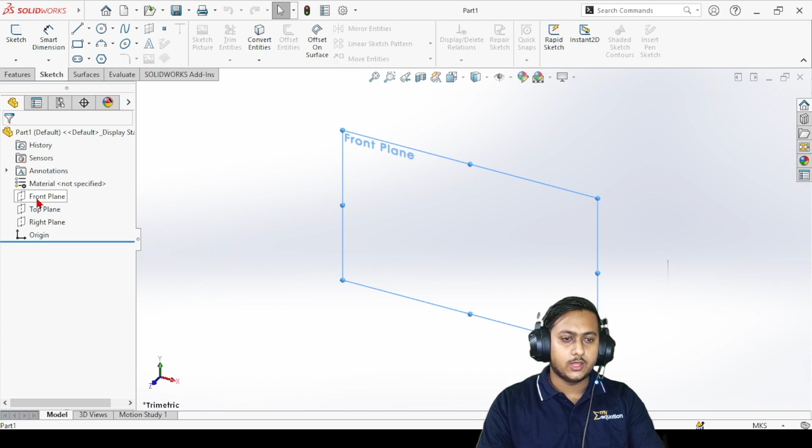So for that, let's go to the top plane and make an axis in the middle first. Let's take a gap from here of around 0.11 meters, and make a circle with a radius of 0.1. Then let's make another circle at a gap of 0.22 meters - I'm taking these dimensions from the model as I told you.

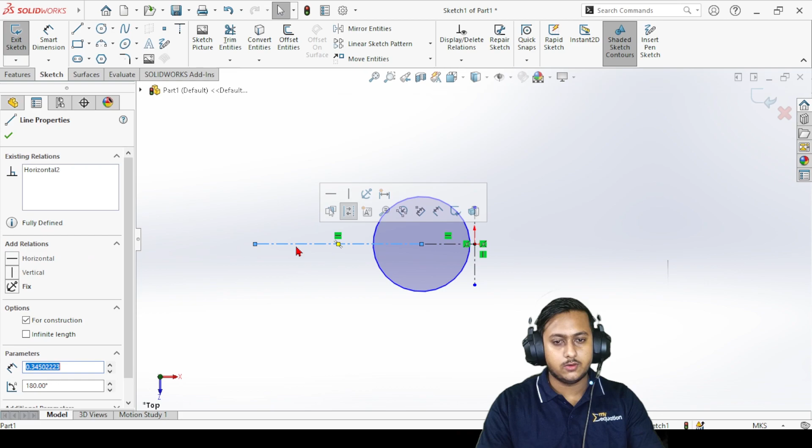Let's make this horizontal, and make this circle fix. Now let's give this line a dimension of 0.22. Now if I make another circle here with a radius of 0.1 again, there you go.

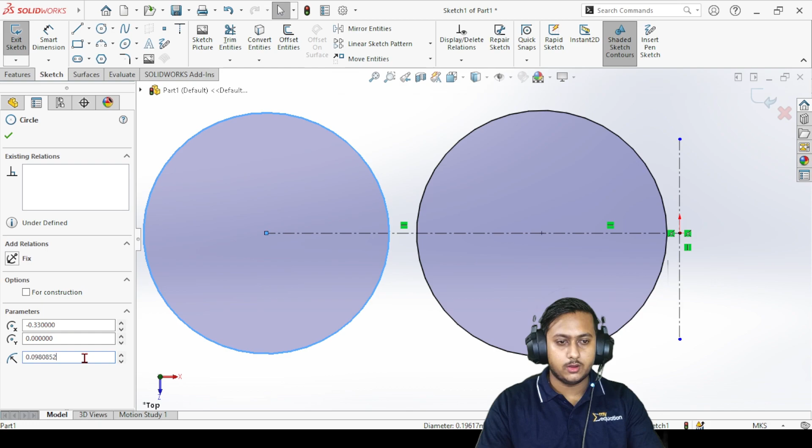Now we can mirror these two circles on the other side. Click on mirror, choose both circles, click mirror, and choose this axis. There you go - these are the four pistons arrangement in my piston assembly. Whichever crankshaft you are making, take the gap and diameter of the piston head from there to make this kind of arrangement.

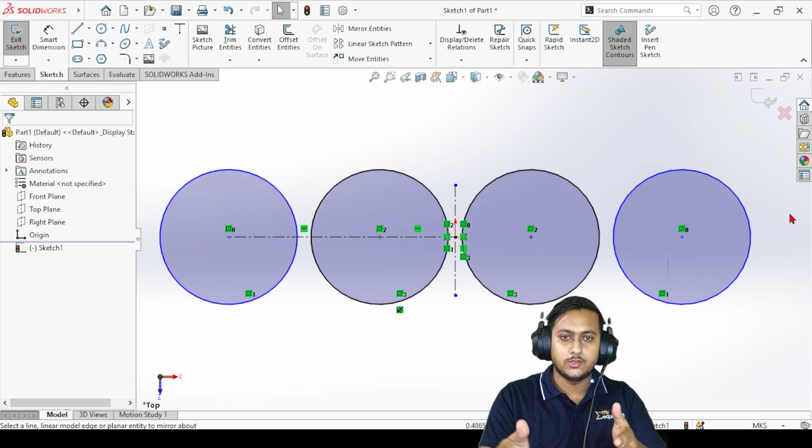After making this, you can make an outer portion for it. Let's choose center rectangle and start making a rectangle from here, something like this, and give this a dimension of 0.3.

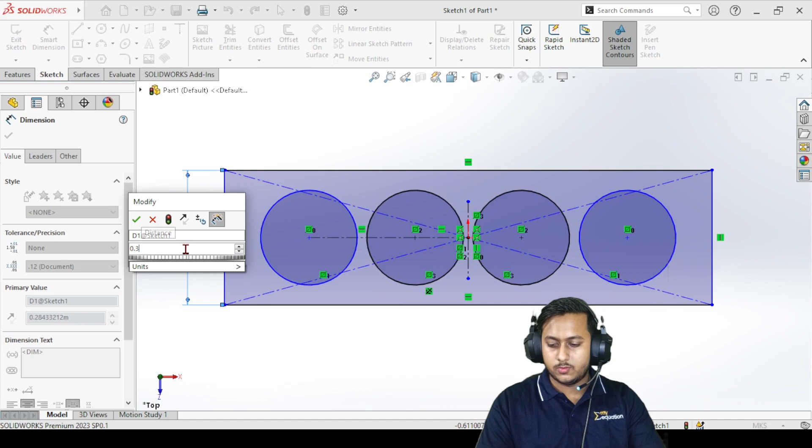All right, let's give this one a dimension of 1.08235. After making this, you can just simply go to extrude, and there you go. You have this geometry ready, and you can just extrude it.

Like this, then you have 4 holes in between on which we can attach our pistons. For this depth, I want to take it as 0.35. Yeah, this is fine, right?

Now we can just make the bottom part of it where we want some hollow portion, so that the connecting rod can move around with the crankshaft. So they have some space for rotation.

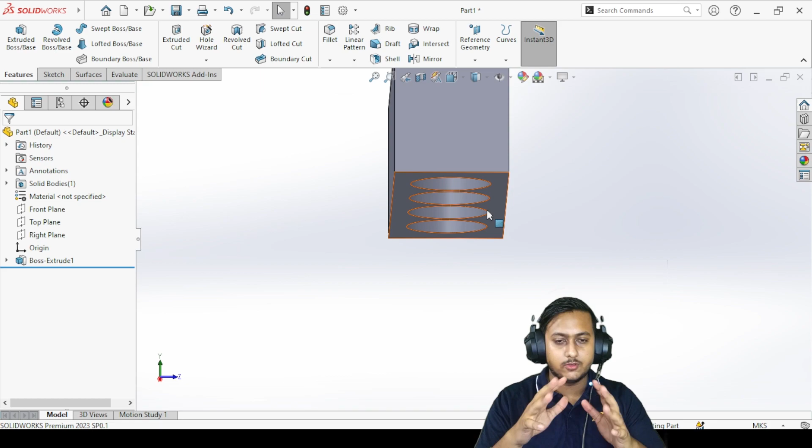For that, I'm going to choose this surface as a sketch, and I'm going to make an arc. First, let's just make an axis, and let's give it a length of 0.82.

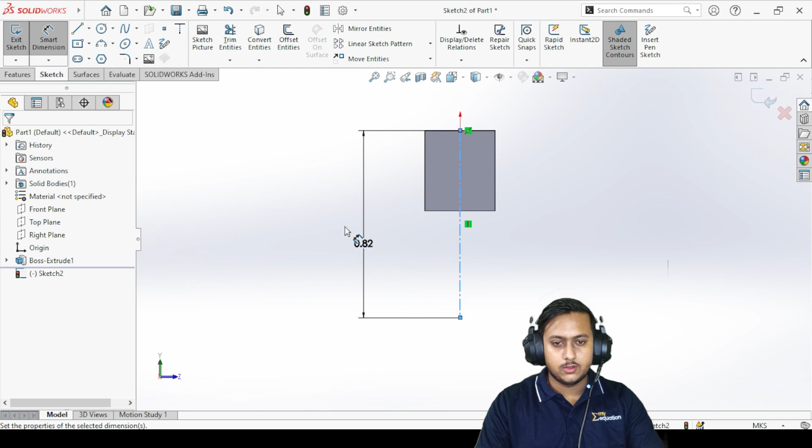0.82. There you go. Now I want to make a circle with a radius of 0.25. So let me just type 0.25. So this will be our radius, right?

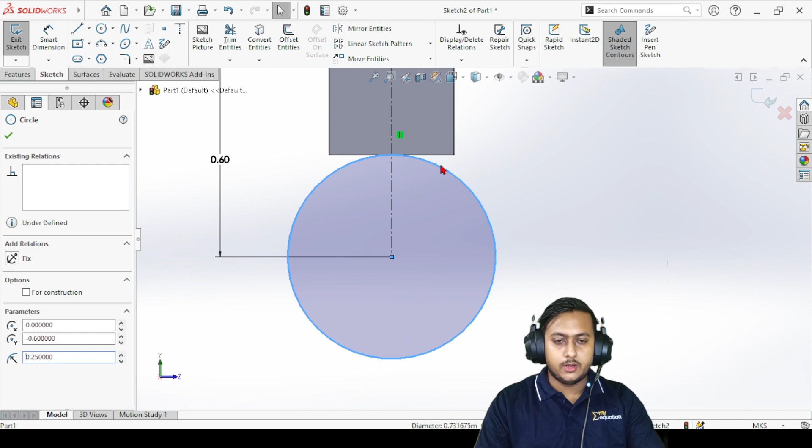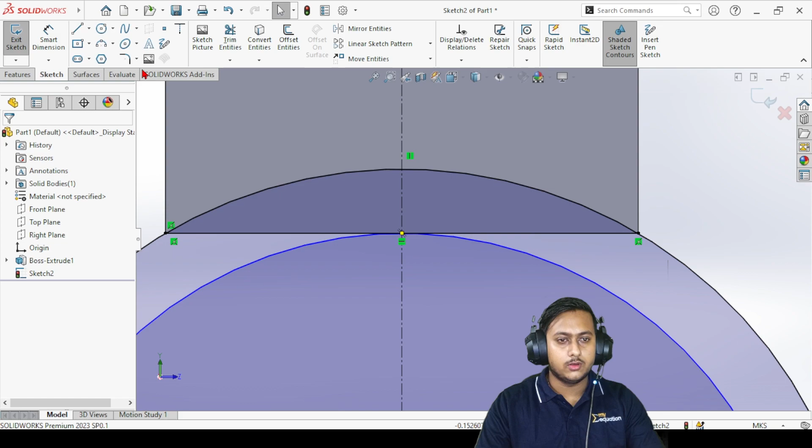Now let me just close this by choosing this end point, and let's just trim the part which we don't want. First, let's choose a line and close it from this point to this point. Now I don't want this line over here, so just choose trim and delete it. There you go.

After this, you can just simply extrude it if you want to. First, let's just make another hole over here for taking our shaft out from the crankshaft.

For that, let's just go to the standard plane centered view again, and let's make a circle in between which has a radius of 0.035.

Right now, basically, the cylinder block is just the half portion above this straight line, because for the bottom side we have another part made which is actually connected after putting all the assembly inside.

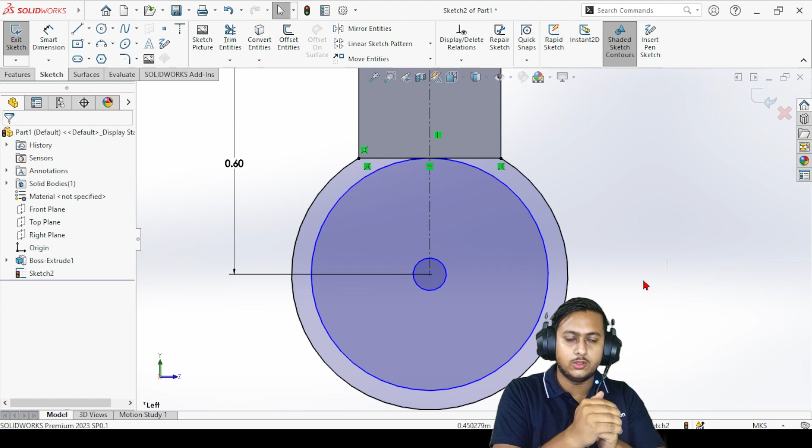So for that, I'm going to cut this portion in half. Let's just make a straight line, and let's choose trim to delete those lines which we don't want.

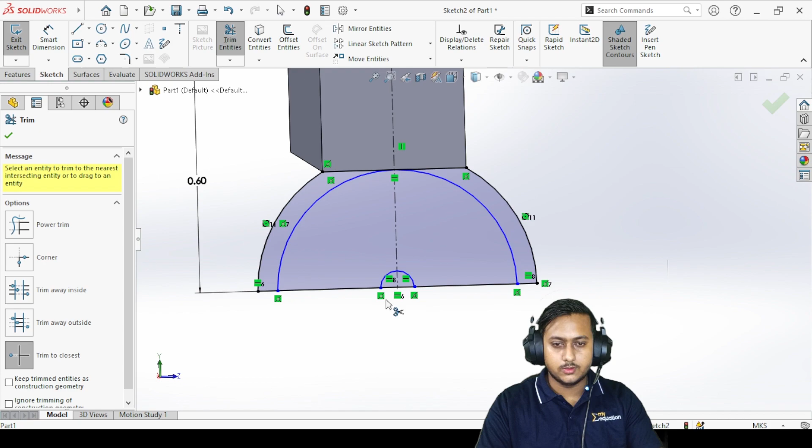Okay, I forgot to delete this line over here. Now we are good to go. And let's just delete this one over here as well in the middle.

Actually, I think first we have to make the whole solid part, and then we have to cut it, because I want a hole over here as well, and I want this part inside as hollow, not this outer part. I want this portion to be hollow inside, and at the outer portion, I want this to be cut.

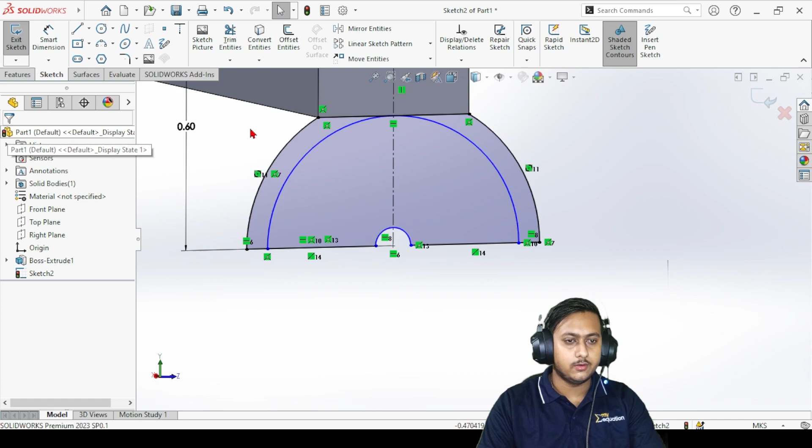So what I can do, let's just cut it for now. Let's just extrude it, and let's just delete this middle line. Let's just extrude it till the end on this side, and instead of blind, choose up to surface and select this surface.

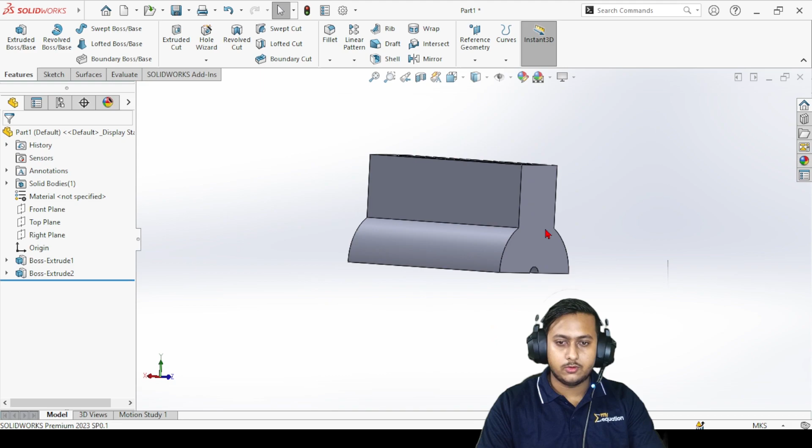Now we have this geometry ready. Now we can just make a reference plane inside, adding some gap. Just make sure that this gap must be bigger than that gap on which we are going to make a reference plane.

So for that, let's choose a reference plane, let's choose the surface, and I want it in the inward direction, so let's just flip the direction. Click on this flip offset feature, and just increase the gap. This is fine, just click OK.

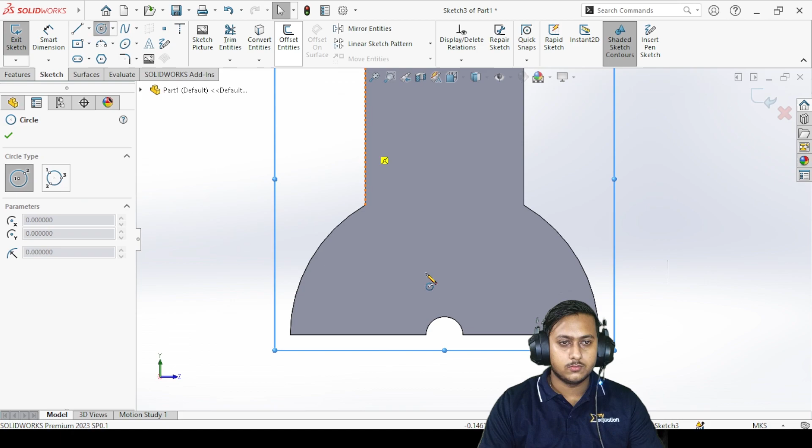On this plane, we are going to make the similar profile to cut. So we are going to make again a circle, choose the center, and make a profile with a similar radius, just like that one, which is 0.25. Just like this, and as you can see, it is over here.

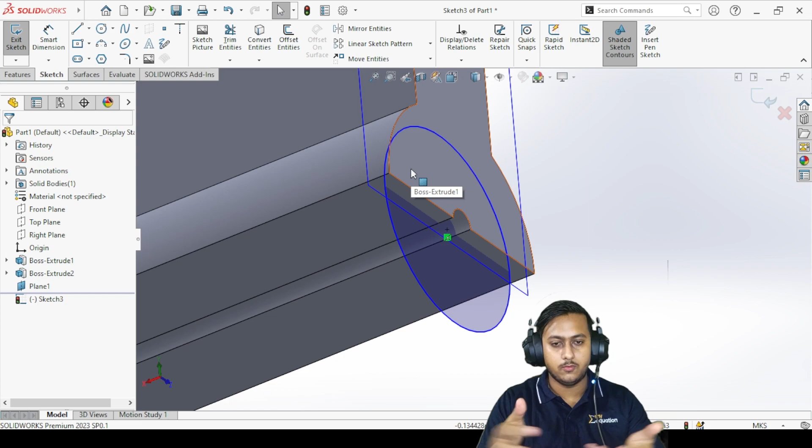So if we cut this end portion, it has some thickness which we actually want. So now we can just simply cut it like this as well, because we are cutting it, it doesn't matter if you remove the bottom portion or not.

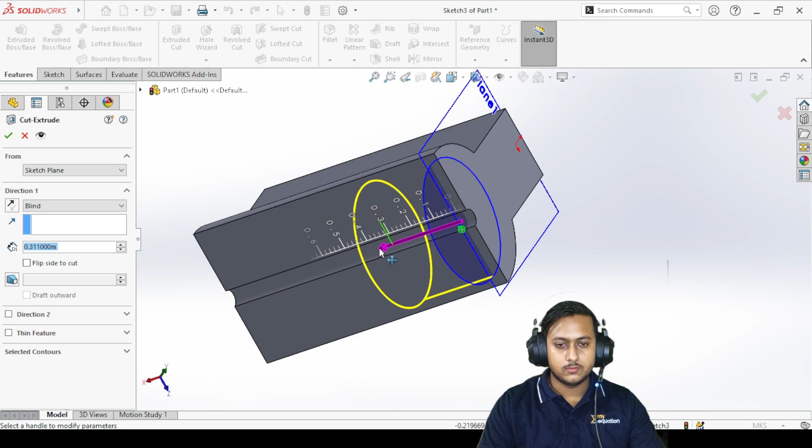For this one over here, let me just drag this. This whole length is something around, I actually didn't measure the length. First, let's just close this.

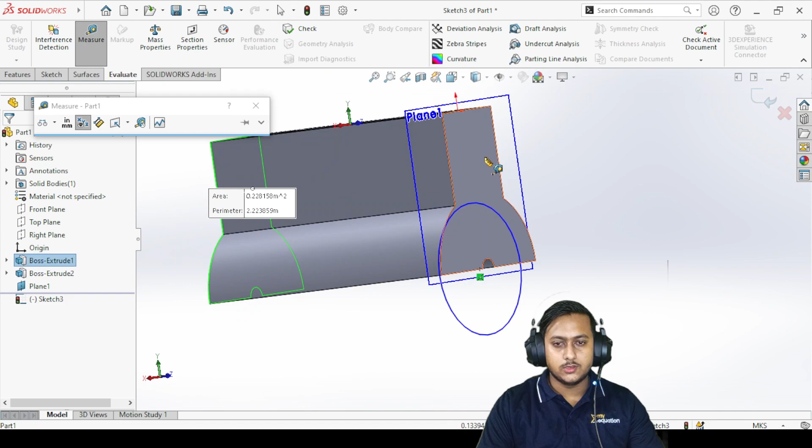Let's go to evaluate, let's go to measure, and just select these two faces so that we can actually know the length of it, which is something around 1.08 meters. Yeah, it is 1.08 meters.

So now on this side we have a gap of 0.04, and on the other side as well we have a gap of 0.04, which is equal to 0.08. Then we just have to give this cut a length of 1 meter.

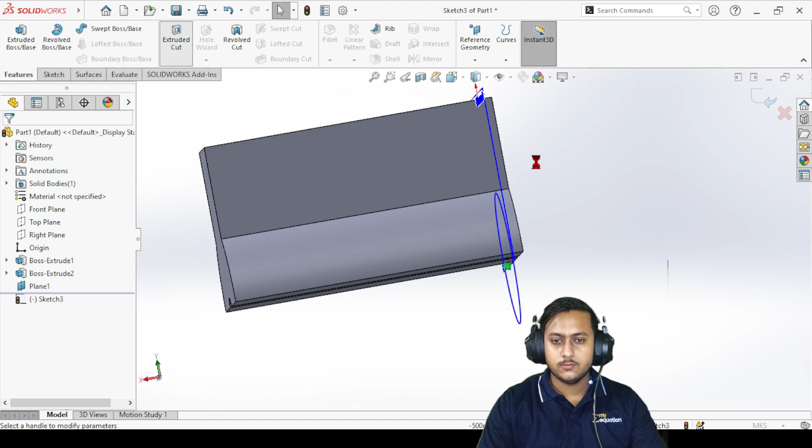So let's just go to extrude cut now, and let's give this one as, sorry, 1. There you go. Okay, it has some errors. Now let's see what error do we have.

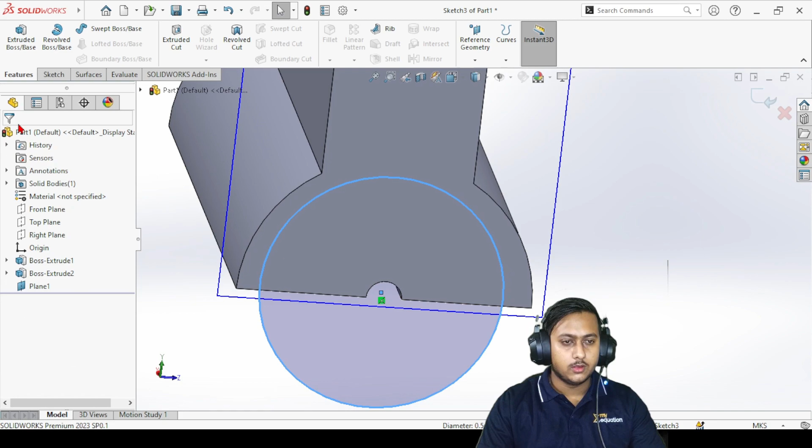It might show an error because we have an open boundary here with a similar length, which is actually 0.05. So instead of 0.25, let's decrease this length to 0.24. This should work. Now let's go to the extrude cut feature again, give it a length of 1, and click OK.

There you go. Now we can select and hide this plane. As you can see, we have some gap, but we have lost those holes.

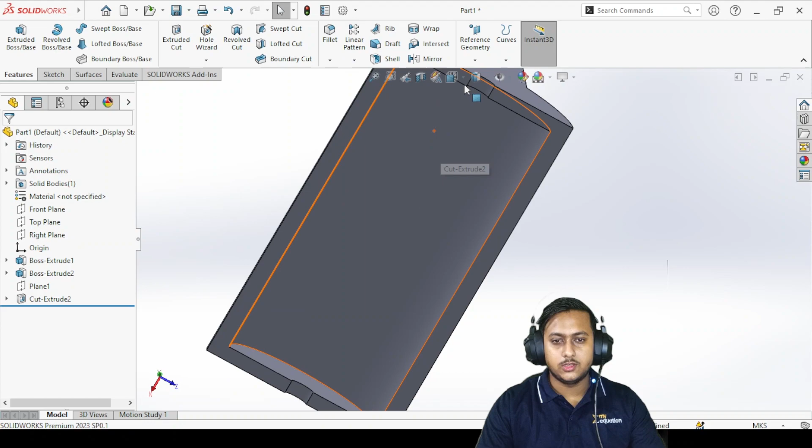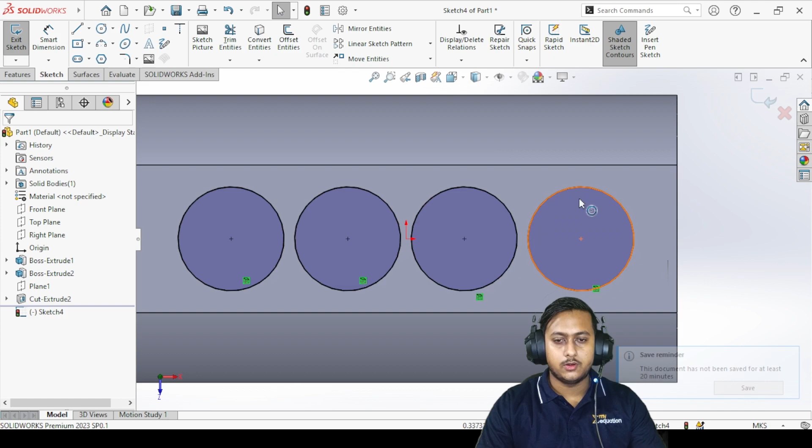So what we can do is click here, go to sketch, choose all these circles, or simply select and click on convert. Select and convert again. Now we can cut it. Just decrease this length and click OK.

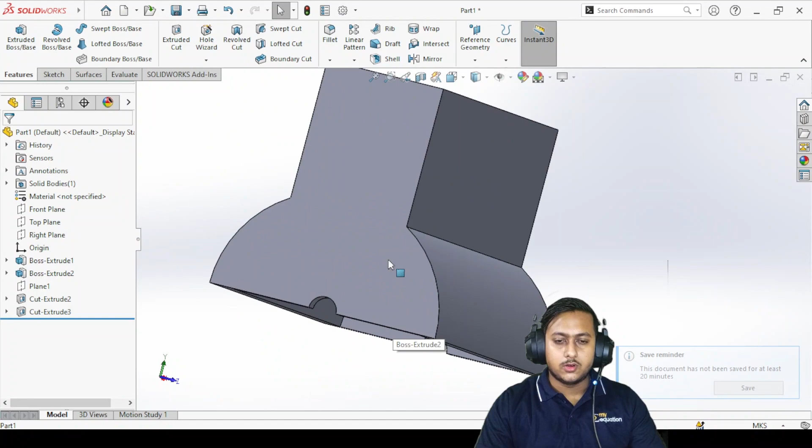There you have it. You have all these holes ready to attach your pistons, connecting rod, and crankshaft. Now we can just leave it here, or do some detailing for better heat distribution on this whole cylinder block, because the combustion reaction is going to happen on this body. The main force of that reaction happens on the cylinder block and piston.

So let's make those holes for good heat distribution, and after that go to fillet and finish it. Let's do some detailing with one part, and give it some pattern, add some length.

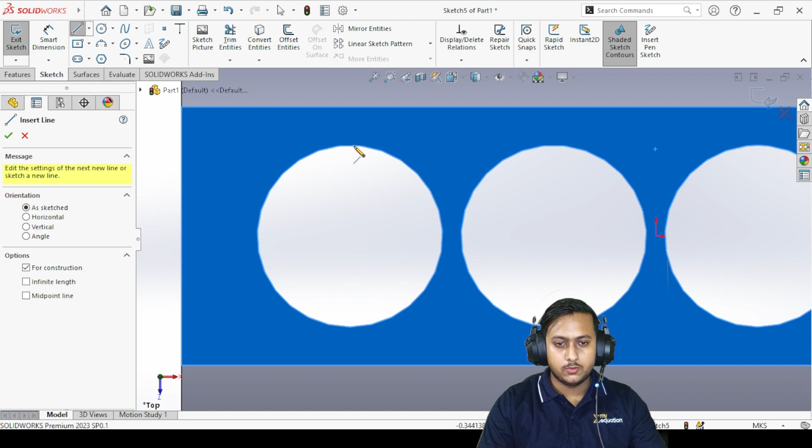So let's make an axis first to know the exact gap between them. This is 0.1 and this is 0.11. So let's give this a length of 0.11.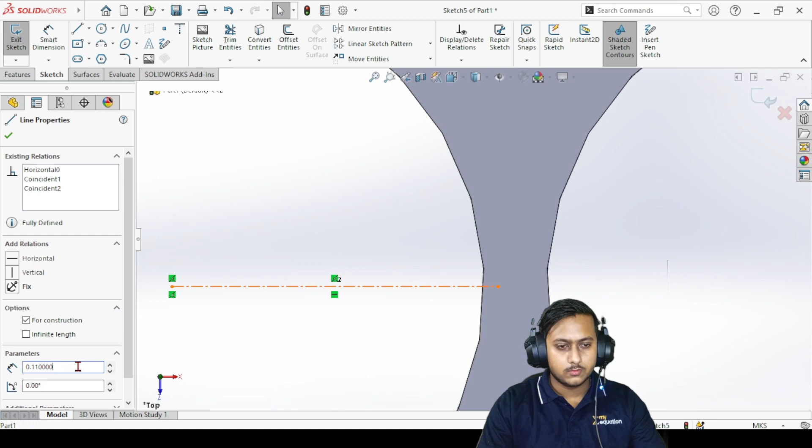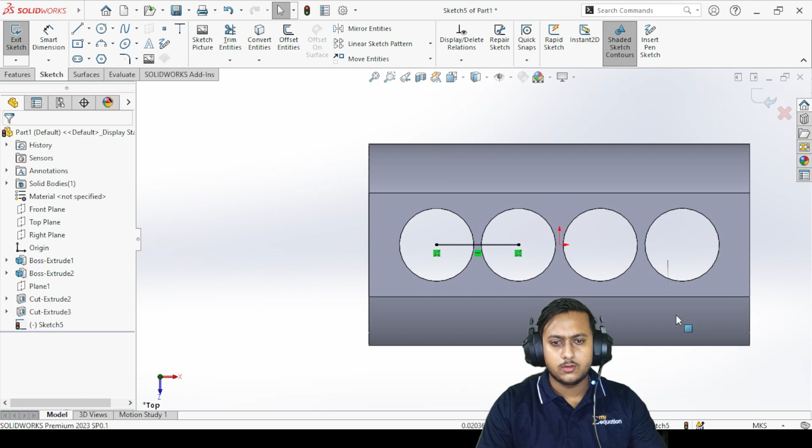Wait a second, let's see the gap between them first. Let's select a point here and a point here, and this is 0.23 something. But if I remember, I actually gave it a length of 0.22. Just give me a second, guys, I guess we have a mistake here.

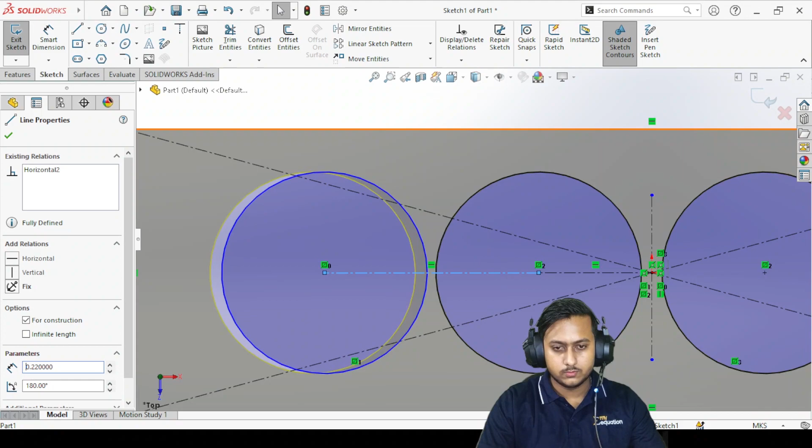Let's correct it. First, exit out from the sketch and click on edit sketch, and let's see if we gave this a length of 0. Okay, let's give it a length of 0.22. There you go, now click exit, and we have it. Now we can edit the sketch.

Let's delete this line and make an axis. Let's place it here and give it a length of 0.11. Now, as you can see, it is exactly in the middle.

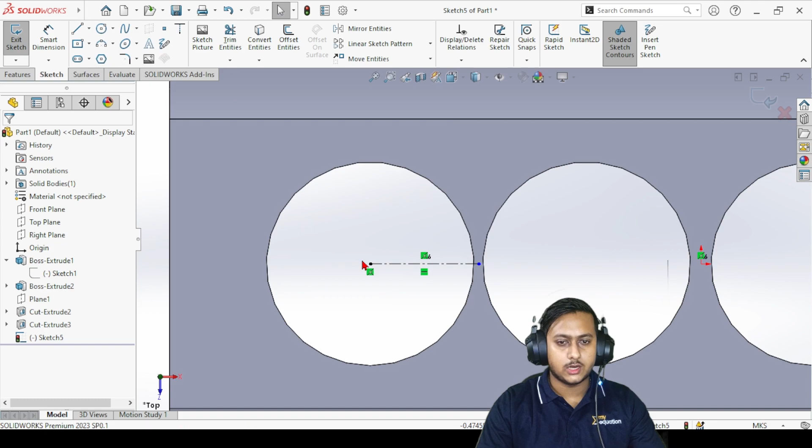Now we can simply place a similar line on the axis above, just to give it a standard dimension. Let's place a line here and give it a dimension of, let's say, 0.12.

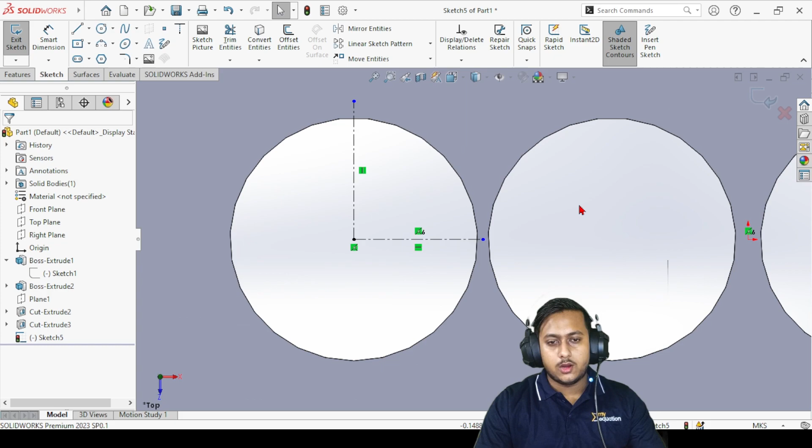Now, whichever pattern we make, we're going to make it inside this square portion. If you want, you can actually make a square. Just click on this point and take a dimension from here, and click on this. Now we're going to make all those holes.

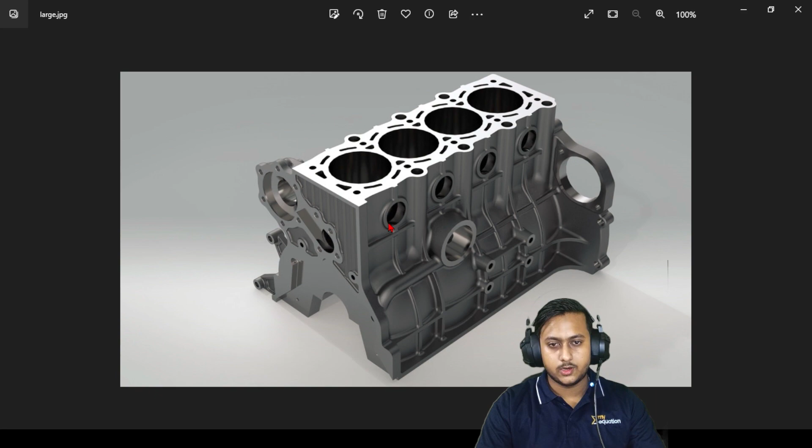For that, you can take reference from this image, or just make random holes if you want. If we take a reference from this image, it has one circle, then one profile. In the middle there's a small triangular kind of hole with some round edges. On the other side, the left side, it has a similar hole and an arc kind of hole on top, and a similar triangular hole which is kind of deep on the left side, where we don't have a connection between two holes. So let's make something like this.

Let's start making a hole from here. Okay, not here. Yeah, exactly over here.

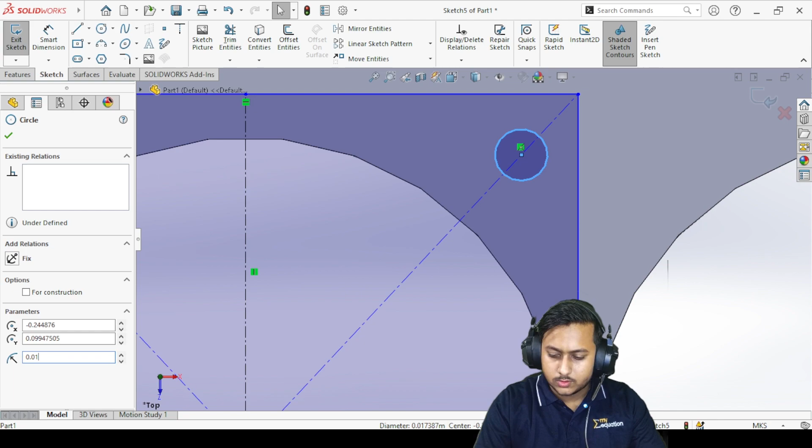Let's give it a dimension of 0.01. Now let's make another hole over here, a little down from there. Let's make something like this, and let's give this one some kind of curve.

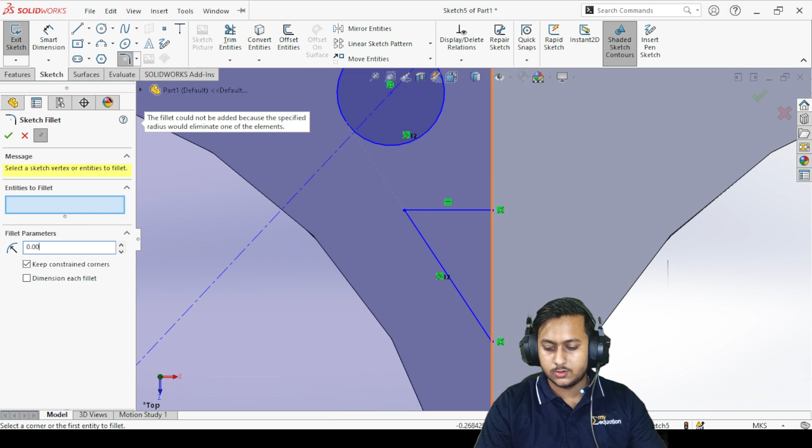For here, I'm going to choose this fillet, and let's decrease this radius to 0.004. Now if I choose this point, it has this kind of curve.

Over here, if you want to give the curve, then you have to make a line first. So let's make a straight line over here. Or let's avoid a straight line, let's make a similar line just like this line over here. So for that, what we can do...

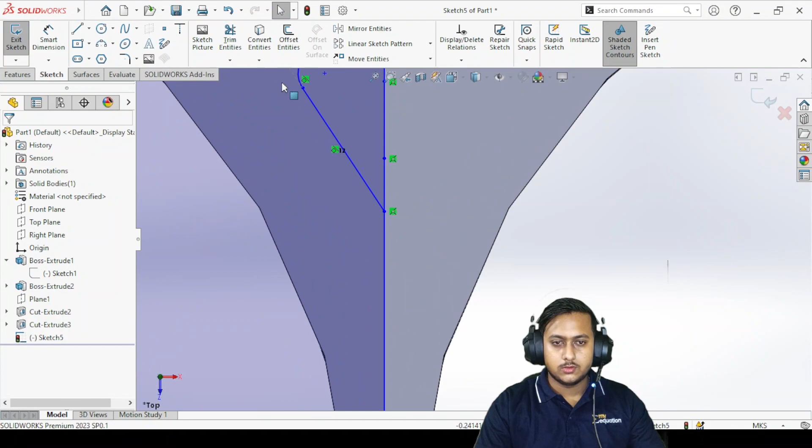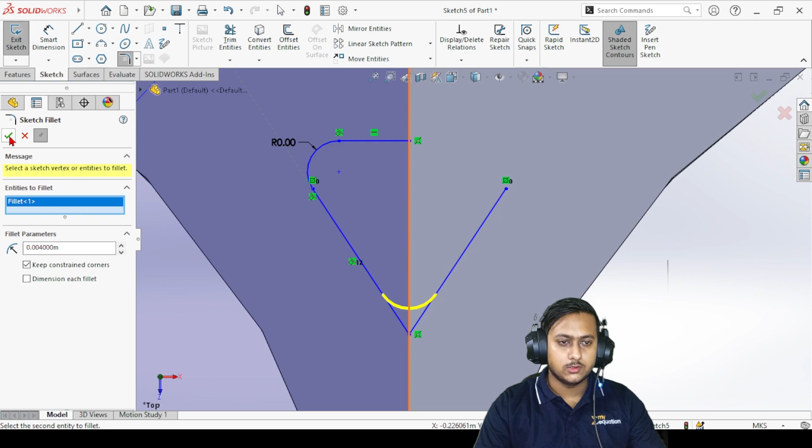Now what we can do is go to mirror, choose this line, and on the mirror about, choose this axis. There you go. Now you can choose the fillet and give it a fillet like this. Over here, yeah, it is fine.

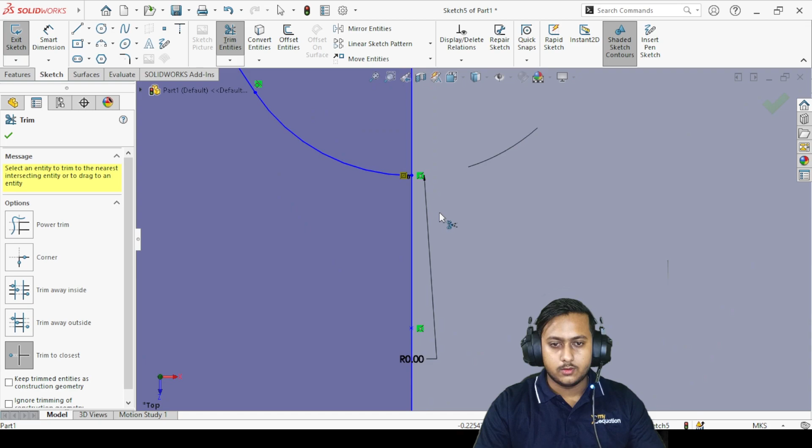Now what you can do, you can simply delete this, or let's just trim it instead of deleting it. Yeah, this is fine. Now it is fine. Now you can click over here, and let's make a pattern over here, which is an arc.

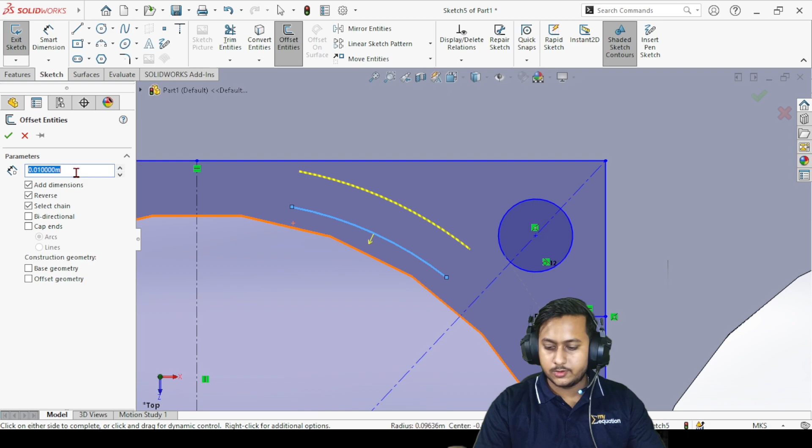Let's choose an arc. Let's make an arc over here. Let's give it an offset, reverse, and let's decrease this radius to 0.008. Click on OK, and let's choose another two arcs.

Just like that over here as well. Now what we can do, we can just mirror it. So let's go to mirror, let's choose these two, and let's click on mirror.

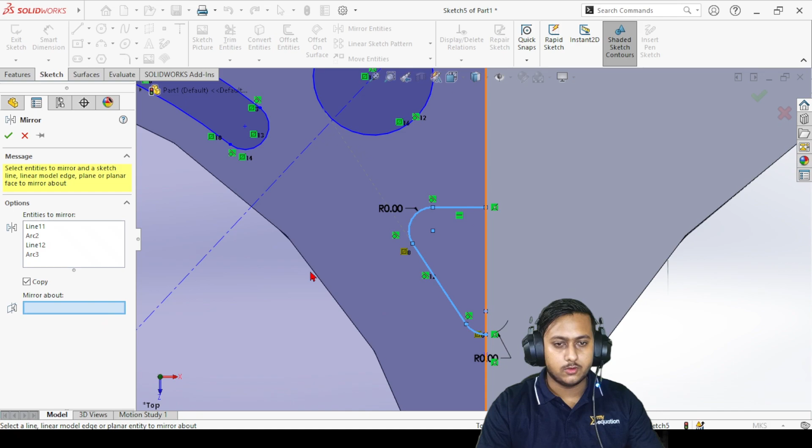Or instead of making that deep cut, you can just make this kind of cut over there as well. Let's go to mirror and let's choose this one, this one, this one, and this line over here. Let's click on mirror and let's choose the middle axis.

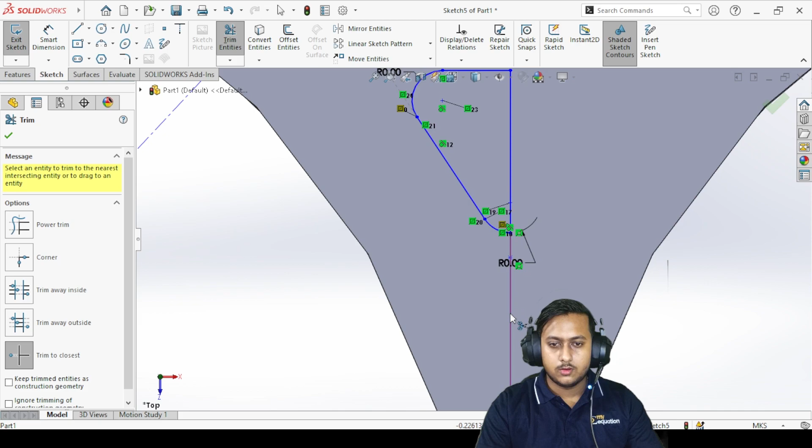There you go. Now what we can do, we can simply delete the square from here, which we don't want. Let's delete this edge, delete this one over here, and let's delete this one from there. Just like that.

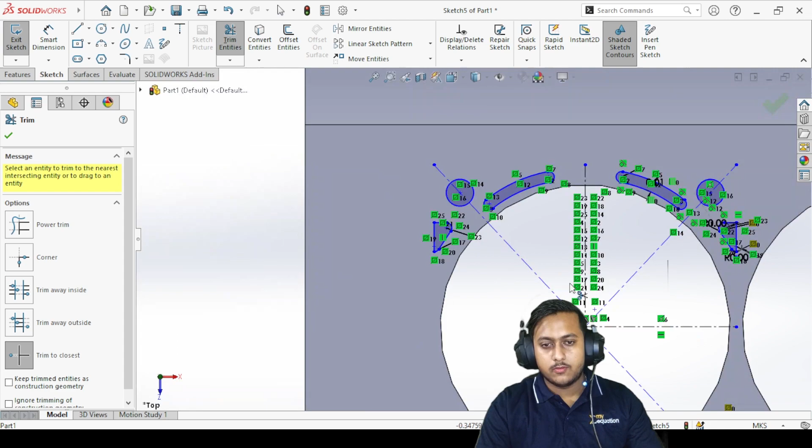Right, and we can mirror. We can actually delete this, but that will affect this line over here as well. So what we can do is delete it one by one. Now what I'm going to do is mirror this whole pattern on the other side, or first let's just mirror it on this side over here. So for that I'm going to select one by one every single thing.

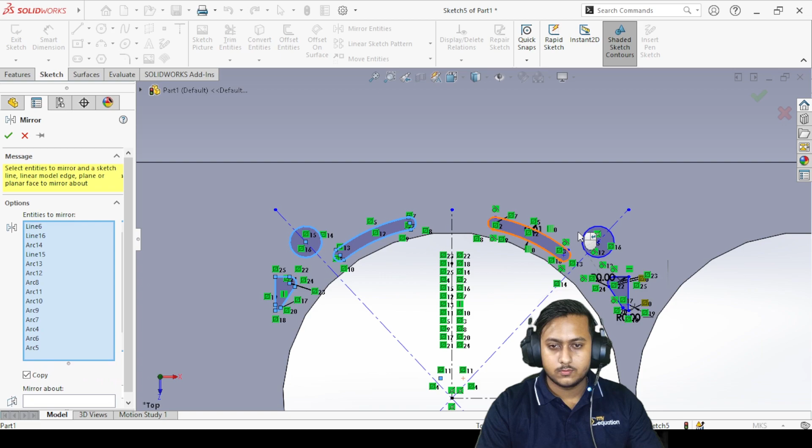Just like that. Click on this axis for the mirror. There you have the similar pattern.

Now you can use linear pattern to mirror it, or you can simply mirror this one by one, whichever you find comfortable. I'm going to use the linear sketch pattern, and I'm going to select first the x-axis, yeah, and in this...

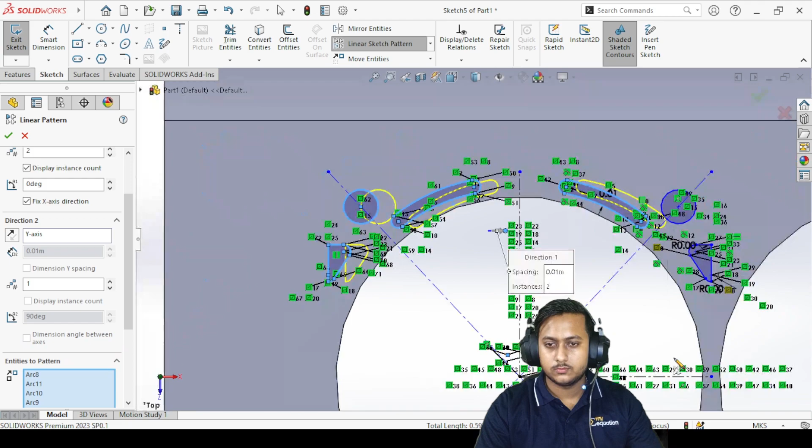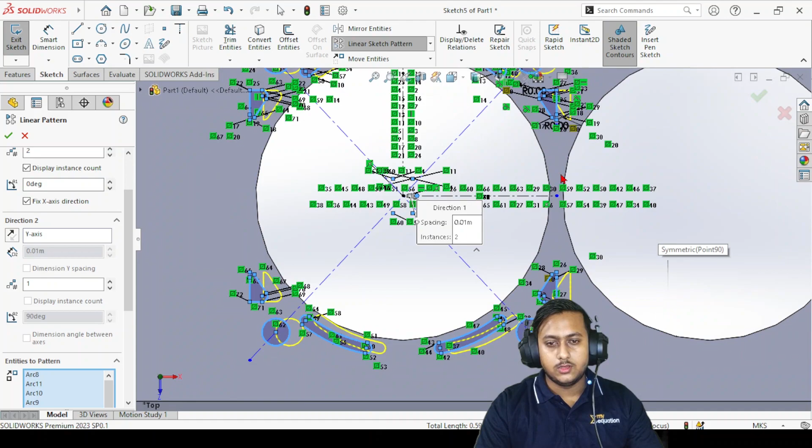Choose the select tab, just select all these things one by one. There are a lot of constraints over here, that's why it is taking some time. To avoid that, you can delete it one by one from the very start. These green things are actually constraints. If you want, you can delete them. And right now we have selected everything.

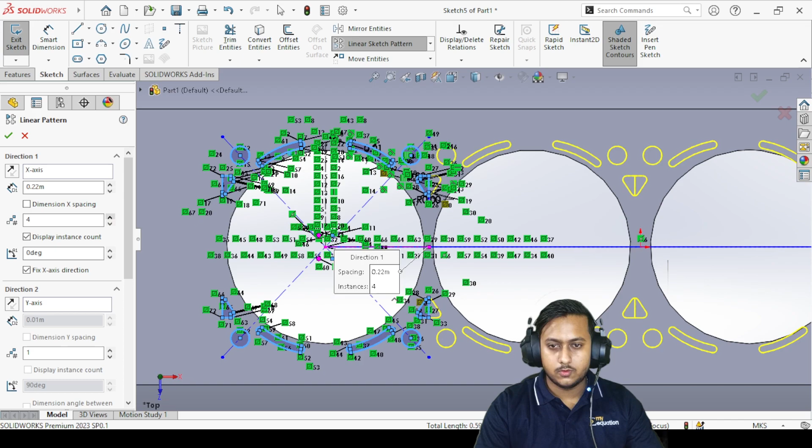Now we can increase the distance between them to, let's say, 0.22. And we can increase the number of patterns to 4. Now if I click on OK, as you can see, it is saying that it contains a large number of relations. Just click on yes, and there you go.

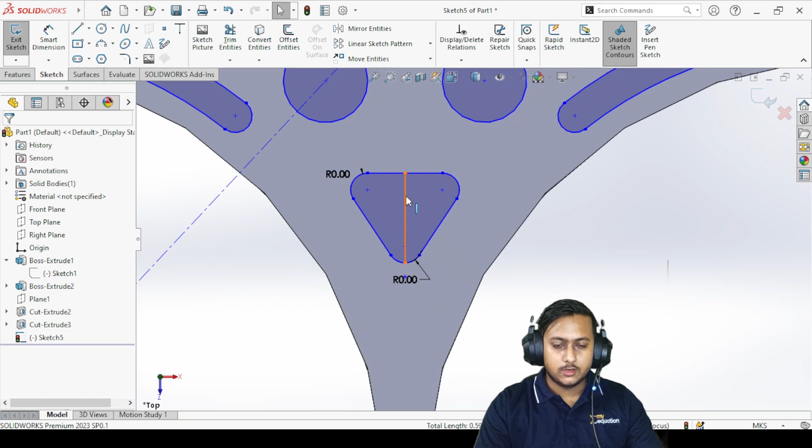Now it will make your interface a little slow, but don't worry, just give it some time and it will be fine. Now let's delete this line over here.

Let's delete it again. There are two lines now, and we want this whole sketch as one, we want to delete it. So let's trim this portion over here as well. There you go. Over here it is fine. Let's delete this from here as well.

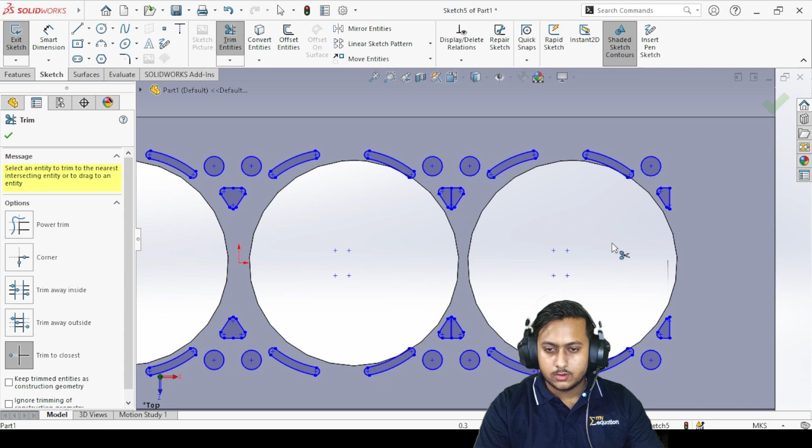Okay, this is not in the middle. Did we do anything wrong? Let me just see. Let's press Ctrl Z.

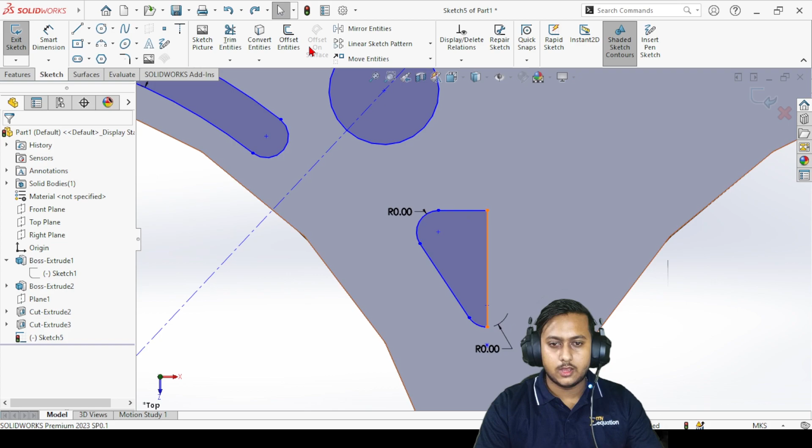Yeah, we are back again over here. What we can do is simply avoid this line over here. That will help us a lot. Let me just see what is the dimension issue.

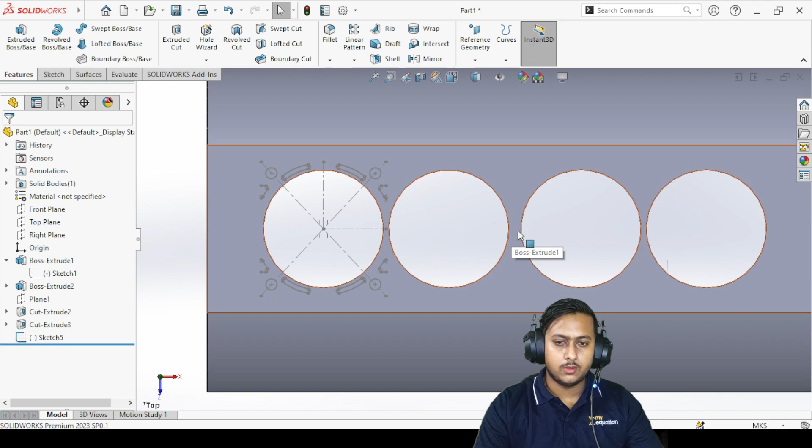Yeah, now it is fine. Let's just delete this line over here as well. Now if I click OK and exit the sketch once, let me see if these two are at the similar gap or not. Let me just check. Yeah, actually this gap is a bit higher than usual, as you can see over here, it is less, right?

And this is creating issues, so let's just fix it. Again, go to the sketch, go to edit, and you can just change this gap between them. Just go to smart dimension.

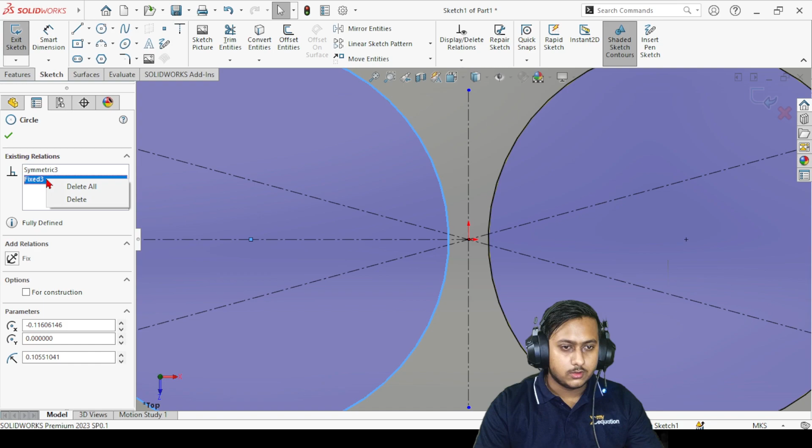Or before going to smart dimension, if you remember, I fixed this sketch, so let's just delete this fixed constraint. I deleted them all, don't worry.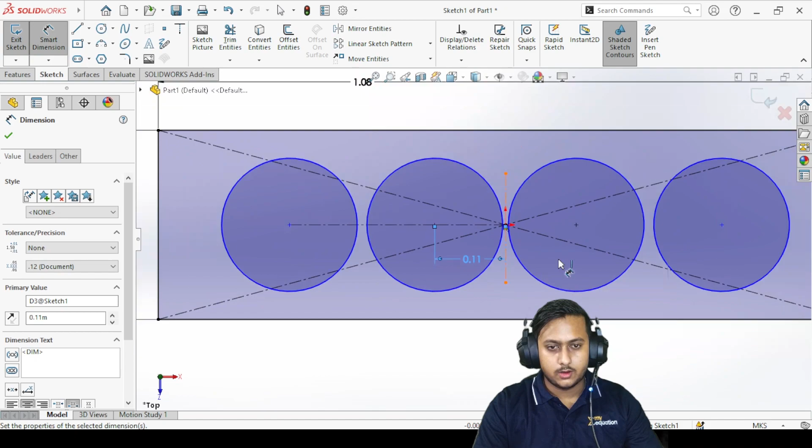Just click on smart dimension and choose this point over here and choose this point, and just specify this gap as 0.11. Yes, right. And over here also, just define the gap instead of giving the dimension to the line.

As you can see, it is increased. Just give it 0.22, right, that will do the thing. And yeah, it is changed everywhere. Now we can just click OK and exit the sketch, right?

Now let's get back again to the sketch, and let's just give it a pattern, a linear sketch pattern. Okay, there are some changes over here, as you can see, because I changed that sketch.

So let's just clear them over here. Select the middle point. Okay, it is not from here. Let's place a line on this.

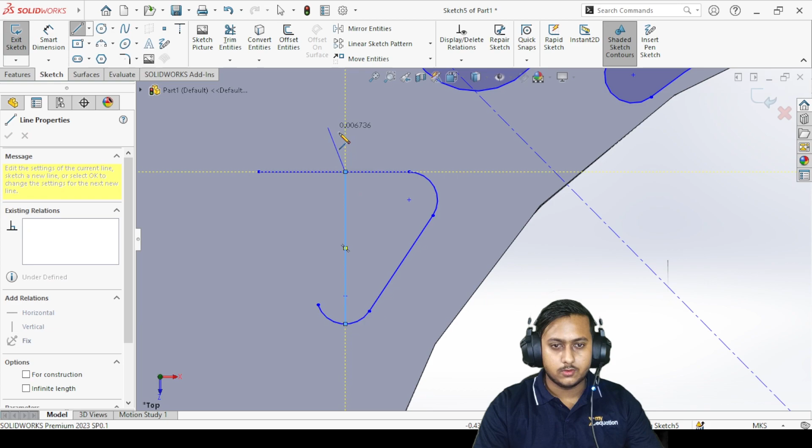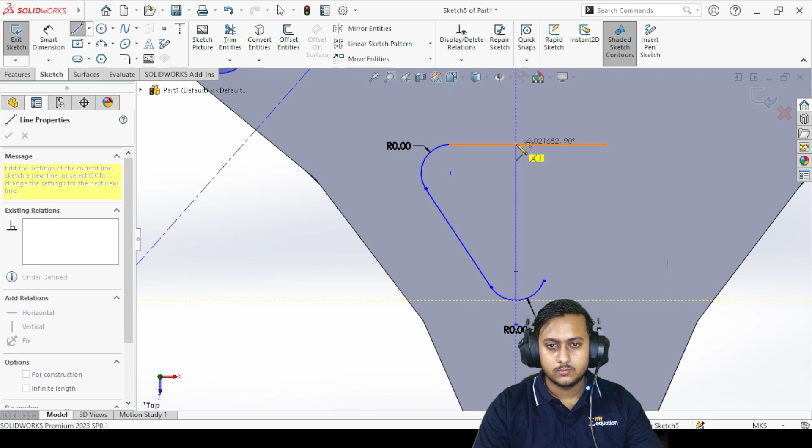A similar line over here from the middle point. Yeah, from here. Just make two lines, similar like that, over here as well, from the middle point, vertically upwards and vertically downwards over there as well.

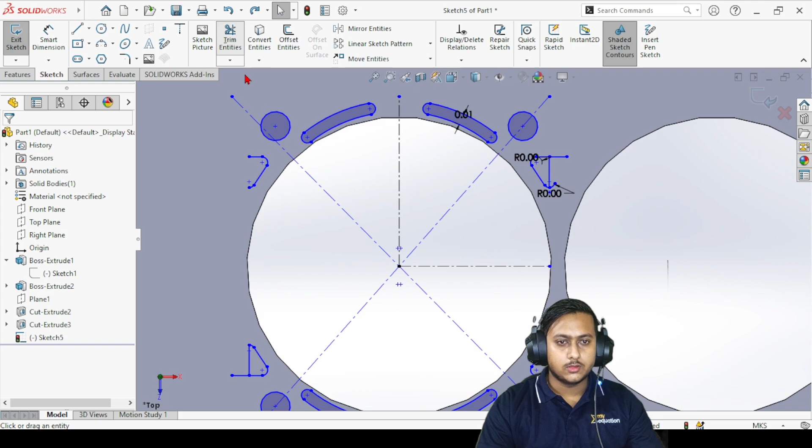Right now we can just trim this feature, this extra part actually, and let's just trim this line again for this one. Okay, just press Ctrl Z. Yeah, now let's get back again to trim, and first delete this line, then you can just delete this one.

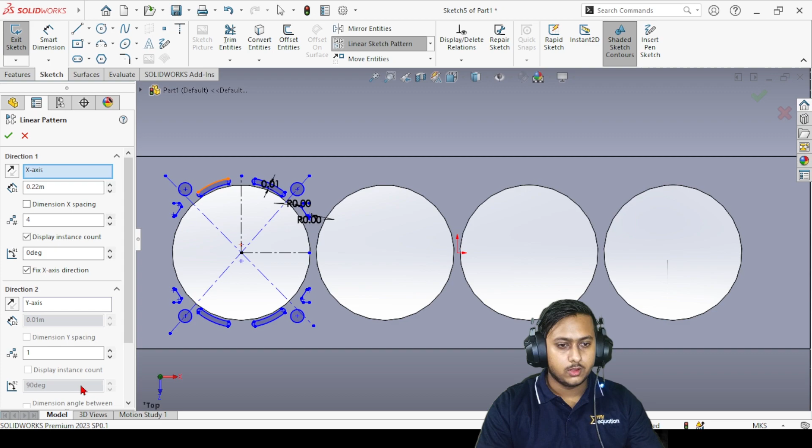There you go. Now if I just give it a pattern, it will just do the trick. Just give it to linear sketch and select this gap 0.22, increase the number to 4, and in this selection tab just select all of these.

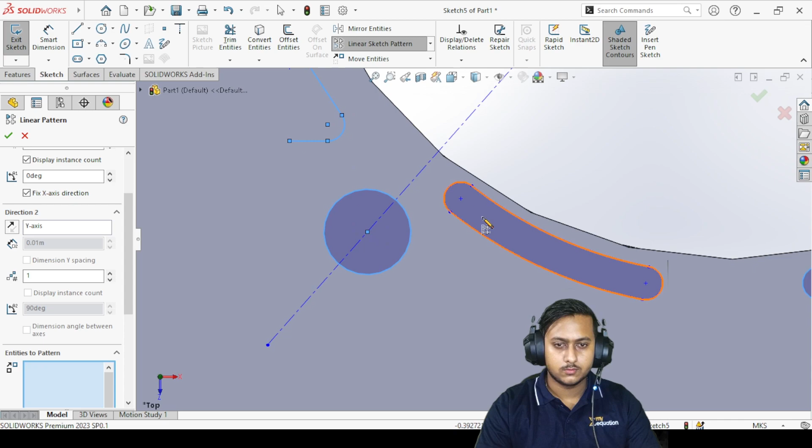Okay, there is some gap between them. That issue comes because we changed that sketch, but we can fix it. We can just make some lines to connect them. So for now, let's just click on OK, and as you can see, these are not messing up right now.

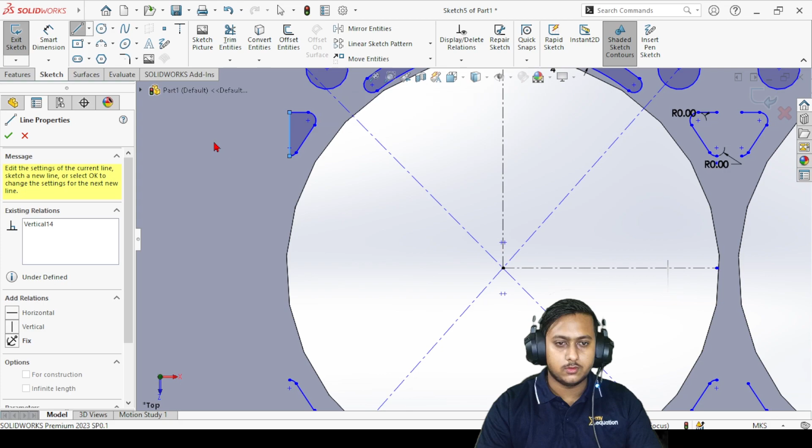We can just make some lines to connect them. Let's just make some lines to connect all these open things, right? A straight line, connect them one by one.

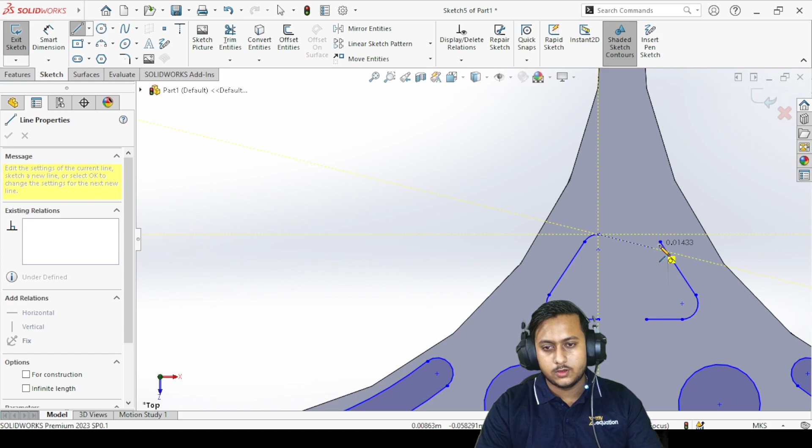Okay, we forgot to add this one over there. Let's just connect it like this, and let's choose this one over here. You can fix it, right? You can just press Ctrl Z again and select everything. I actually forgot to select that part, just on the downward one.

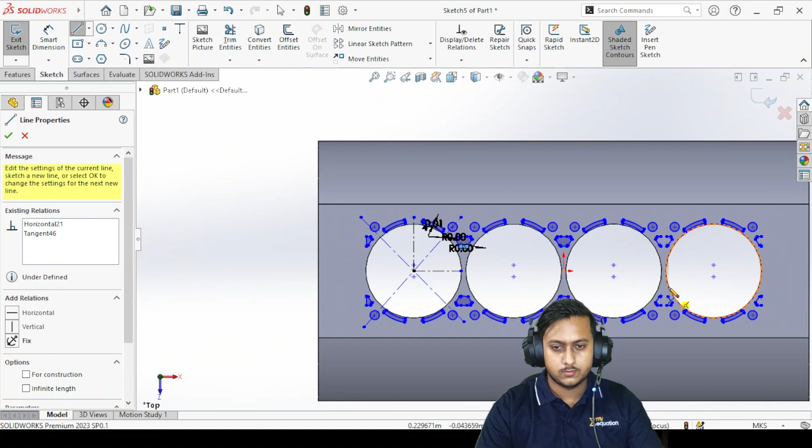One more advice from my side: while you make these kind of patterns, sometimes, very few times, SolidWorks actually crashes. So just make sure you save your file. If you have less than 4 GB of RAM — if you have more than that, then don't worry — just don't run too many other things alongside SolidWorks.

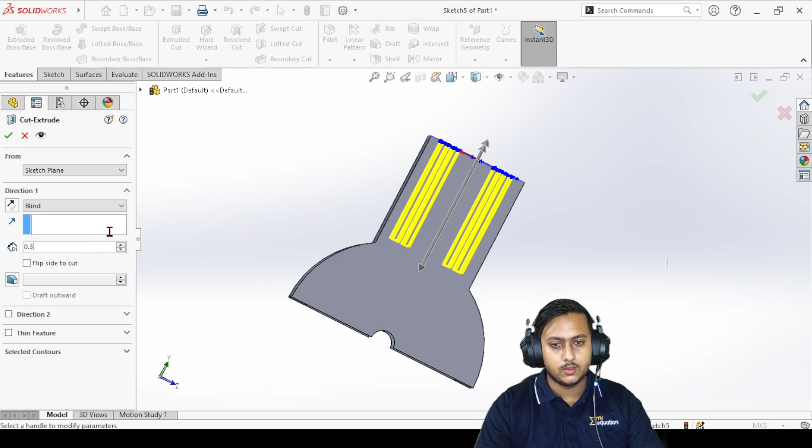Okay, now we are done with this pattern. Now we can just cut it. I don't want to cut it through the whole thing, I just want to cut it over 0.3. Right, just click OK, and there you go.

Right, we have these patterns over here. Now you can make further modifications if you want to. For now, let's just give some fillet on the sharp edges.

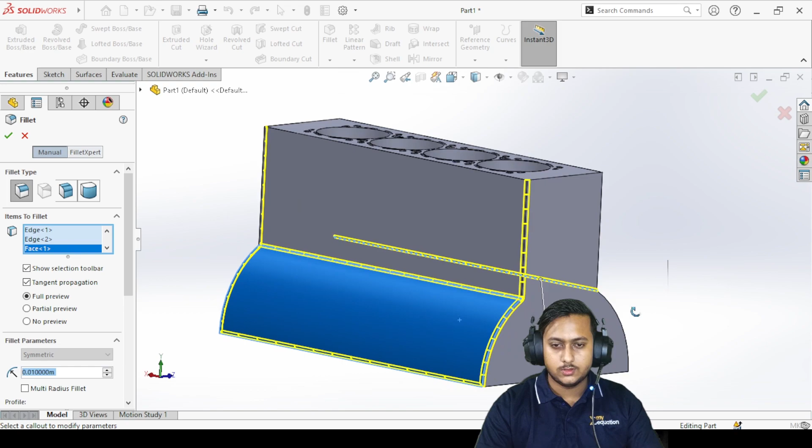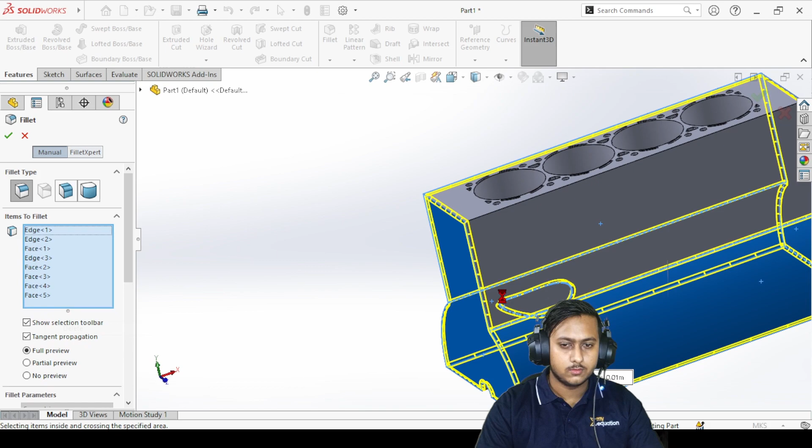Let's just select this hole. There you go. Just click OK, and you have this curved edge.

Right, now over here you can just leave it, or what you can do is simply add some fillet over here as well if you want to. But of course, it's fine.

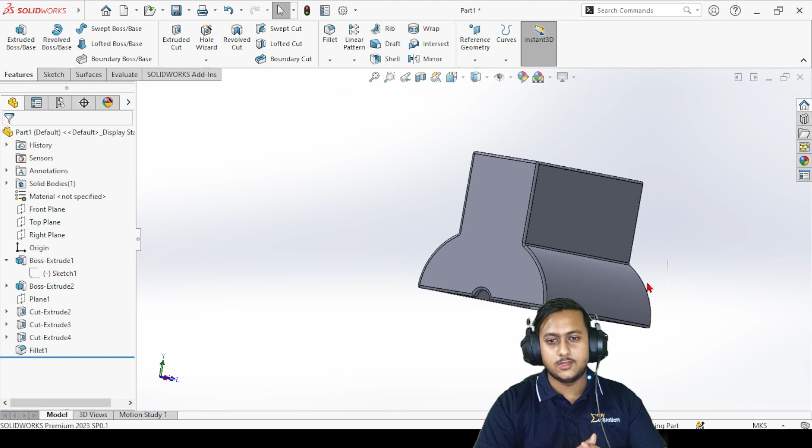For now we can add our pistons, crankshaft, and connecting rod in it, and I'm going to show that in the coming video. So yeah, for this video this is pretty much for now. Thank you so much, and I hope you learned something new, and it is looking pretty much fine. So yeah, that's it for today's video. Thank you so much.